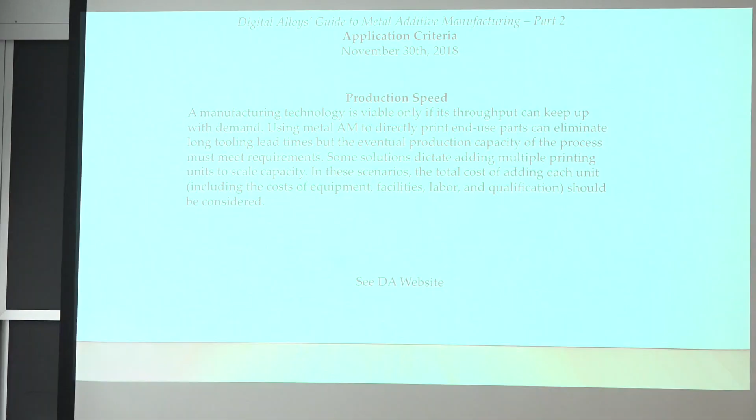So additive manufacturing—if you don't have any questions, hopefully we'll have some to ask Alex next week. We've gone through parts 1 and 2, sort of, and he listed all these different companies and different processes: directed energy deposition, powder bed fusion, powder binder, and others. Look at all these companies—these are not little bit players.

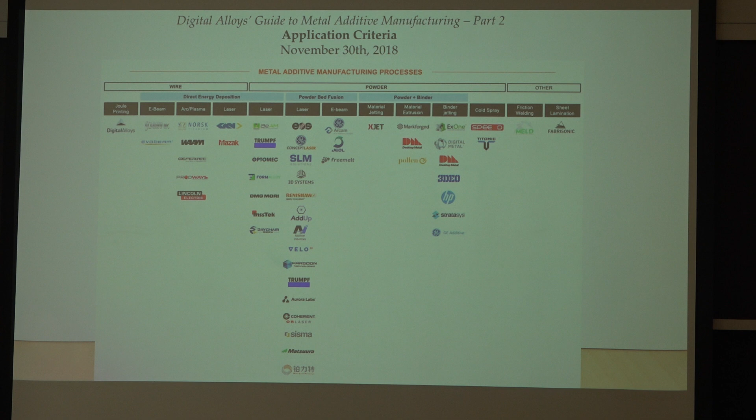Hewlett Packard, GE, Trumpf Laser, Coherent Radiation, Lincoln Electric—the biggest welding company in the world. And then you've got these little companies like Digital Alloys and Desktop Metals, which have very close ties to this department. Now let's go through what I skipped yesterday—a real life example.

So this is a blog, basically, that you can find on the web. There's this guy, Don Nelson, called the Additive Report—he writes newsletters just about additive manufacturing. This is from about 10 months ago.

He writes, as a science writer, that he learned eyeglass hinges are a good additive manufacturing candidate in a recent telephone interview with the CTO of this additive manufacturing company. Here's a quarter, and there's an eyeglass hinge made by powder bed fusion with a binder. He says they can make 45,000 pre-assembled 12 by 5 by 6 millimeter eyewear hinges in a 4-hour shift. Wow.

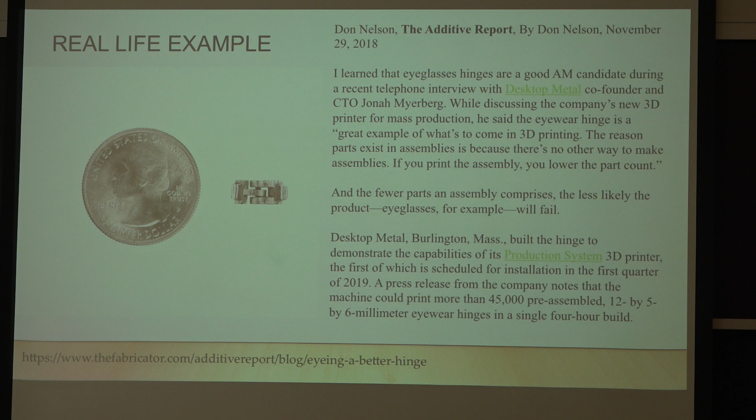So what are these things made out of? I mean, look at them. Well, these eyeglasses are titanium, but in powder bed fusion, you tend not to use titanium powder. A, it's horrendously expensive. B, titanium compared to steel powder—steel powder is pretty cheap.

What else was I going to say about this? If it's not titanium frames, it's probably brass, some sort of brass. Could be stainless steel, okay? And powder bed with a binder is probably fine for stainless. It might be okay for brass and whatnot, but we'll talk in a little bit about what this is competing with. But there's the part.

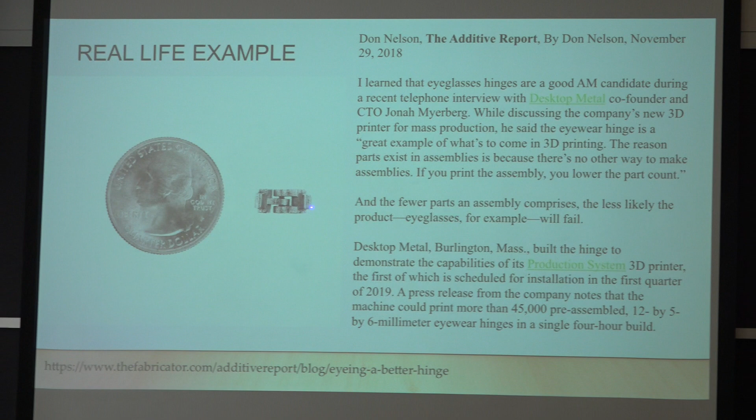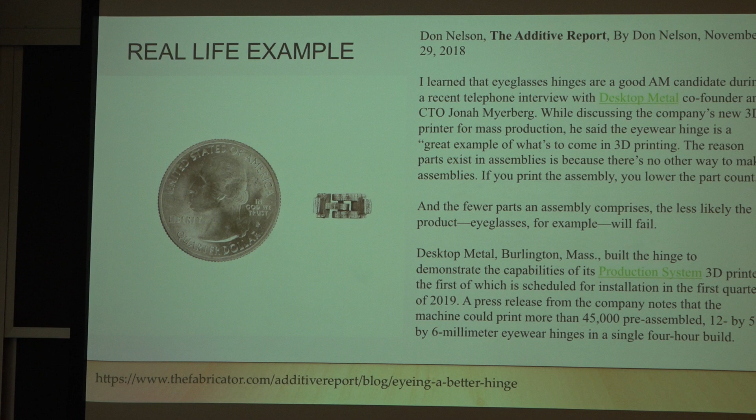Can you see the surface properties of this? They're talking about how you can take three pieces—this hinge and the hinge pin, which we've all had problems with, the screws in our eyeglasses if you wear glasses—and make them all in one part. So we reduced the number of parts, which is a very important design rule in manufacturing, to simplify things and save money.

But do you think people really want a hinge that has that surface roughness? It's going to need to be polished up, particularly if one of the hinge pins is this thing. You don't want the thing flopping around, right? And if you got surface roughness like that, you're not going to have the tight clearances you need for an eyeglass.

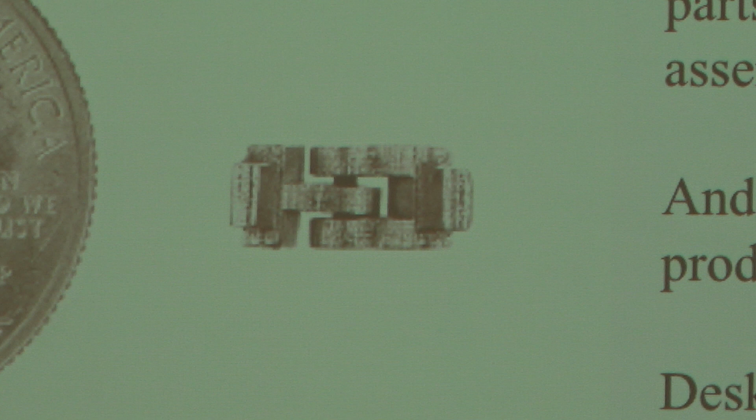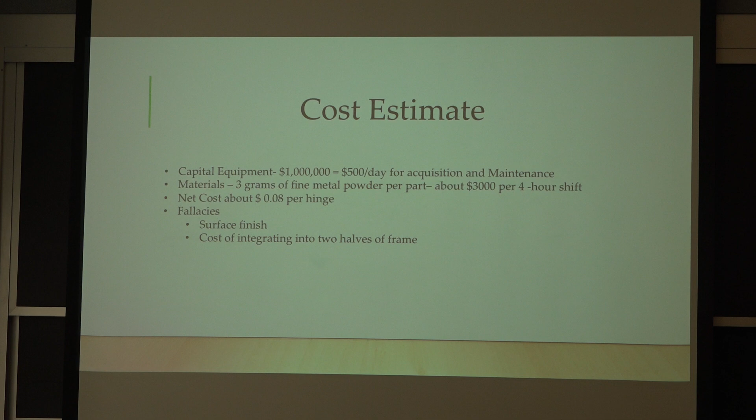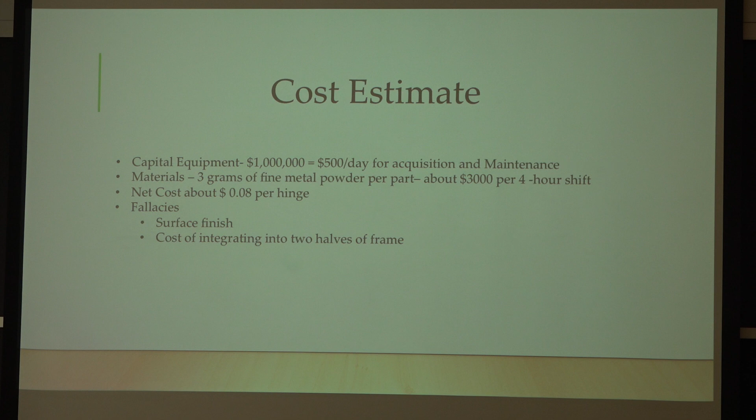And if you start looking at a mechanical machine, it requires a fair amount of maintenance. Mechanical parts wear, okay? And this thing's moving pretty fast. The materials, if we use 3 grams of fine metal powder per part, that's going to work out to about $3,000 per 4-hour shift. The net cost, as I work this out, is about 8 cents per hinge, okay?

The fallacies are the surface finish, and the fact that—well, I don't really care, I'm actually going to make the frames in 3 parts: this leg, that leg, and the frame for the lenses. And then I'm going to assemble it anyway. So I don't really need to make 3 parts together—at least not these three parts. In fact, I might want to disassemble that. How do I repair that if the thing broke? Now, if I lost a screw, I could just replace the screw. So it doesn't really make much sense to me, okay?

Plus, how do we make these hinges today? Well, if you go down to Attleboro, Massachusetts, there's a company called Leach & Garner, which is the reason Attleboro is the gold capital of the world. They have what they call a fancy wire division. Instead of making round brass or gold-filled wires, which are brass with gold on the outside, they have a room the size of this room that has all these dies.

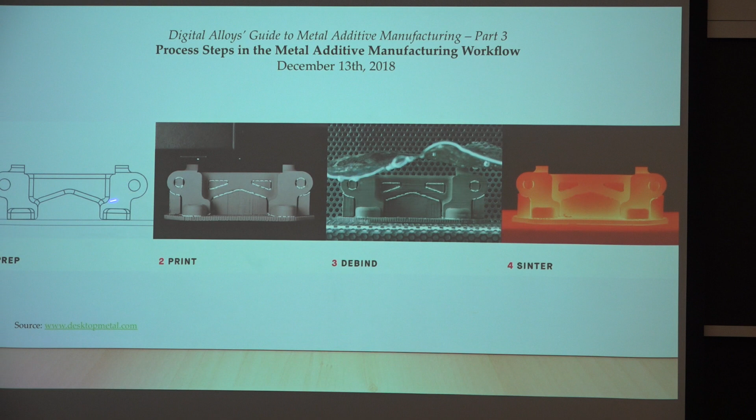Now, part of the step in any binder process is you start with a design. And in the early days, 30 years ago, of desktop 3D printing, the big deal was the software -- to take a 3D object in the computer and slice it into layers, and then change that to the rastering for the robot that's doing the 3D printing, okay? That was what everybody from 1990 to 1995 was working on, that software.

Well, that software you can buy from 20 different places now because everybody was working on it. And you make your green part -- I passed around a green part the first day of class, and it came back in 2 pieces because it doesn't have a lot of strength as a green part, okay? It's just sort of like a piece of candy that you can snap, because it's got porosity and the binder's not all that strong.

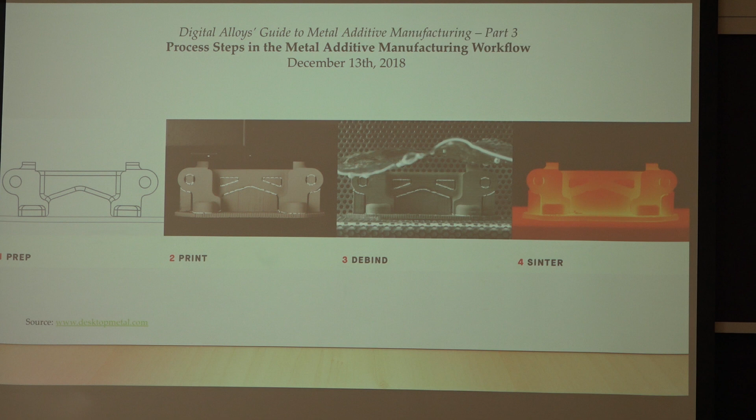Then you debind it, you get rid of all the extra powder and stuff, and you put it in a furnace at a lower temperature, and you boil out the impurities of the binder, the adhesive that's holding it together. That used to be called binder burnout. And when Mike Cima became a young assistant professor here, he changed that to binder pyrolysis, because binder burnout sounded sort of non-techy, okay?

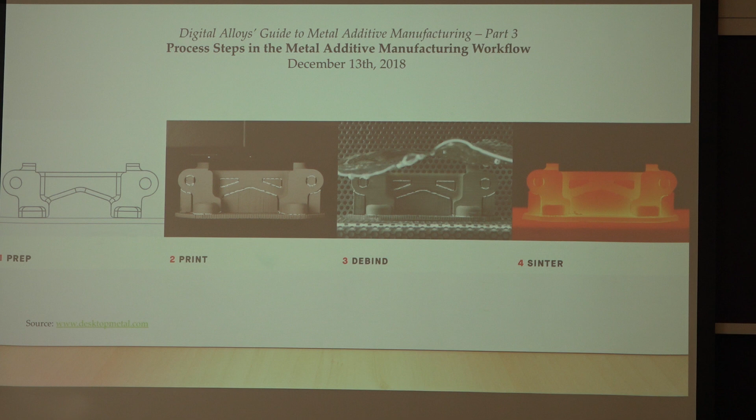But now it's called binder pyrolysis because you're burning it off. And then you have to put it in an oven, because whenever you put powders together -- I don't care what you do, if you study powders, and the ceramists know more about powder processing than anyone else, they've been studying it scientifically for over 100 years -- if I take sugar or salt, or you take your powder and pour it into a vessel and measure the density, it's half the density. It's 50% dense, half of it's air. Doesn't matter if it's spheres, doesn't matter if it's irregularly shaped, unless it's like fibers, okay?

But for any kind of equiaxed but angular or spherical or smooth powder, 50% porosity. So you burn out the binder and you still got 50% porosity. What kind of strength are you going to have on 50% porosity? It's even weaker after you burn out the binder than it was when you had the glue in there holding it together. But you're going to be careful.

And then you sinter it. What happens when you sinter something that's 50% voids? How many voids do you have left? About 3%, okay? Any metallurgist or ceramist will tell you this, you'll always get a little bit of porosity left over. It has to do with grain boundary motion and things like that.

There was a faculty member here when I was a student, Bob Coble, he had been at General Electric as a ceramist. He came out of this department, went there, and he developed a process to take aluminum oxide powder and make it basically 100% dense by putting in impurities that impeded the grain boundary motion. When they sintered that aluminum oxide tube, they could get a translucent tube, and it was called Lucalox, the General Electric name. All the light bulbs around the country, particularly the outdoor ones, were high-pressure sodium vapor lamps because Bob Coble invented Lucalox, which all had to do with grain boundary motion and sintering.

Pixel by pixel manufacturing cannot compete unless you have a functional advantage to your part. If it's just a paperweight or a little fastener that holds a piece of wood furniture with a machine screw, or an eyeglass hinge, believe me, you're not going to compete. You've got to have a functional advantage.

You'll see later things like General Electric and their aircraft engines—they're saving tens of thousands of dollars on a part that used to be 20 parts welded together, now made in one part with little nozzle designs, getting more efficient flow and better fuel efficiency. That's worth millions of dollars.

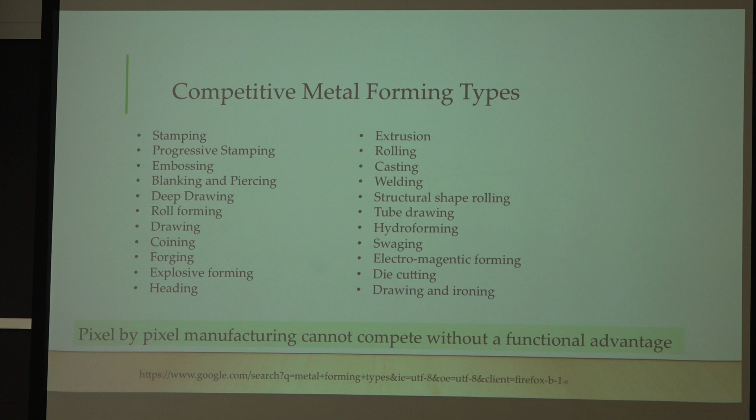So yes, additive manufacturing makes sense, and you can pay $5,000 for a little part the size of your fist. But you can't make an automotive part that way, or do it pixel by pixel. If you go to near net shape manufacturing, the Air Force in the 80s and 90s spent billions of dollars trying to make things near net shape—we'll talk about it later.

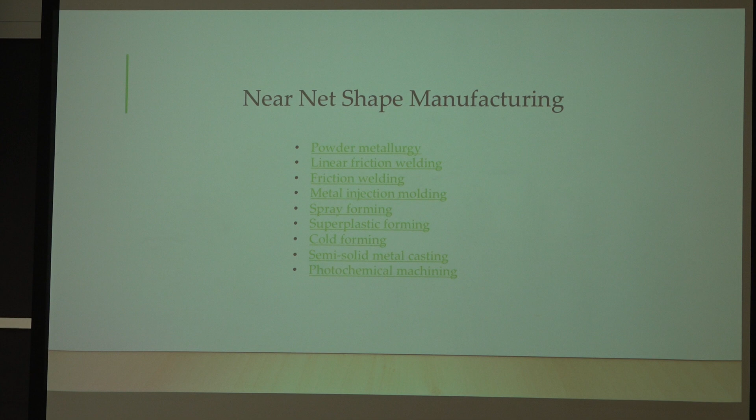If you look it up on Wikipedia, these are some of the technologies. Cold heading is a type of cold forming. Superplastic forming—if you want to know about these forming processes, I give a module on deformation processing. But again, pixel by pixel manufacturing cannot compete without a functional advantage. Remember, there are structural materials and there are functional materials.

Structural materials are made in very large volumes. You're not going to make steel I-beams by additive manufacturing. You can make them by rolling.

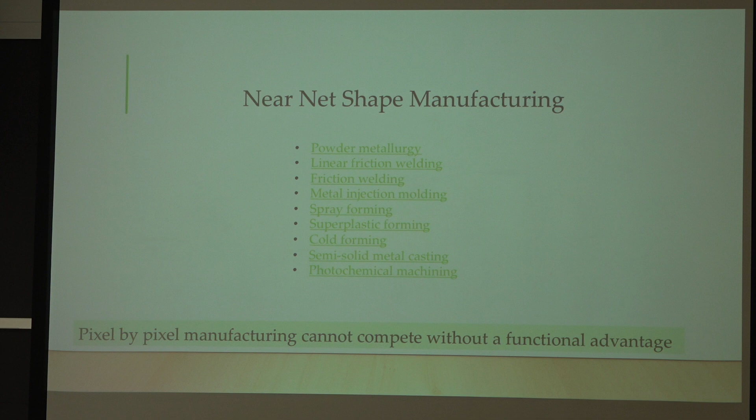That's how Bethlehem Steel, who's now defunct, but they were the first company that hired me, started to be the second largest steel company in the world because they learned how to roll I-beams. And they built New York City. The tallest building before Bethlehem could roll I-beams was about 10 stories, because you had to make riveted I-beams. Bethlehem learned to roll them on the mill. All of a sudden, a cheap process to make I-beams, efficient use of steel, you can go up 100 stories. So some people consider that rolling of structural shapes was one of two technologies that built this second largest steel company in the world.

One was rolling structural beams. The other, they came up with a type of tool steel that was better at machining than anything else, with very high hardness and stuff, and they got a patent on that.

Talking about building construction, have you seen the concrete 3D printer that can print a house?

I think I have seen it. And they're just squirting out concrete, okay. I'm sure you can do it, but I think I can pour concrete into forms cheaper, okay?

Same comment that I have. Because you still need to produce concrete, you're just changing the nozzle instead of simply putting it in a form.

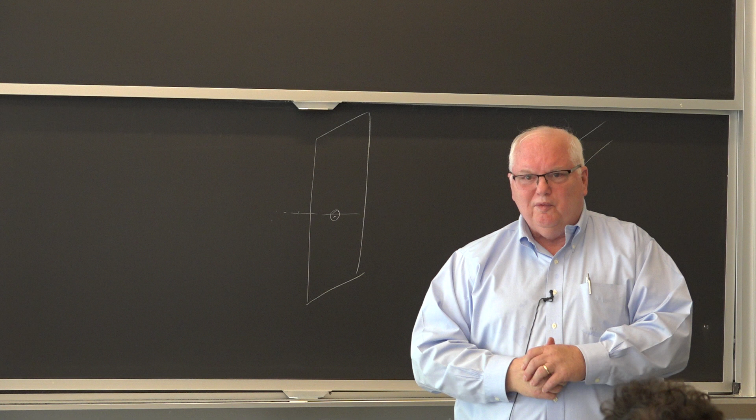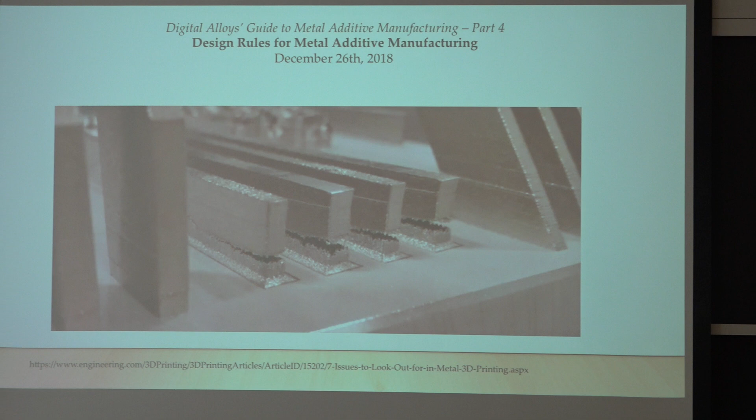Yeah, it is. It's great for building a one-of-a-kind home. Okay, well, I guess people want one-of-a-kind homes. Other questions? So, I'm not trying to rush this necessarily, but part 4, design rules.

One of the design rules involves limitations on the size of what you can build, because most of these processes, not all of them, build up residual stresses. You can see what happens with residual stresses if you're trying to electron beam or laser glaze or melt a surface—you're going to end up cracking. That's covered in the January 1922 Welding Journal article on residual stresses and cracking.

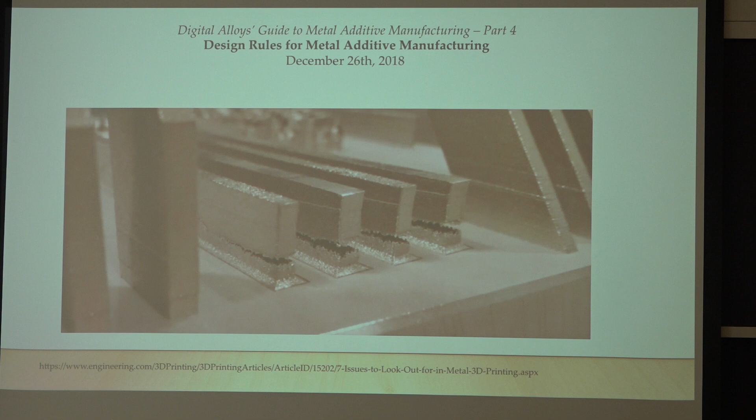Later, Alex goes through and has a nice little plot—it may not be his plot, he collected a lot of this from various sources—and it shows the maximum size when you get to blogs 9 or 10.

Now he has a quote I like, by Antoine de Saint-Exupéry. Who is he? He wrote Le Petit Prince, the Little Prince. He was a writer in France.

The book was translated into 300 languages and sold 140 million copies. It's about a little prince who visited different planets in the universe—one where he learned about loneliness, another where he learned about hope, and so on. But Saint-Exupéry was also a mail pilot.

He flew airmail planes before World War II, so he had some engineering knowledge. He said, a designer knows he has achieved perfection not when there's nothing left to add, but when there's nothing left to take away. Of course, anybody working on airplane parts knows you're looking for the lightest weight—your perfect design is when you've whittled away every extraneous part to get the lowest weight for still adequate strength. He has this nice quote, and a number of people like to quote him. He was a very articulate airline pilot.

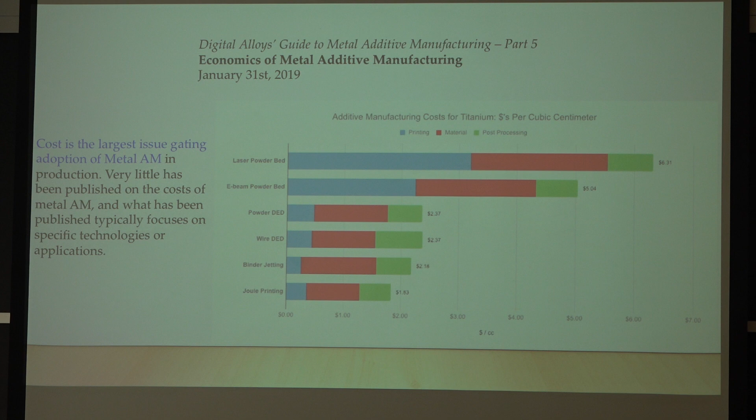So here's the economics—this is part 5, and what he's done is look at titanium. Why titanium? Well, that's their be-all and end-all. I pass around my little World Trade Center thing virtually every class—that's their part. They're making titanium parts for Boeing, or they hope to sell parts to Boeing. He says cost is the largest issue gating adoption of metal additive manufacturing. That's true for most things.

I remember a very prominent faculty member in this department, when he was an untenured associate professor, walking across campus with me toward the Sloan School. He said, did you see Joel Clark's article in the Journal of Metals? I said yeah. He said, you know, I never thought about it before, but cost really is important, isn't it? I thought, whoa, okay—I said yeah, it is. But now he's one of the most successful people, because he's learned that cost is important. He's started many companies since.

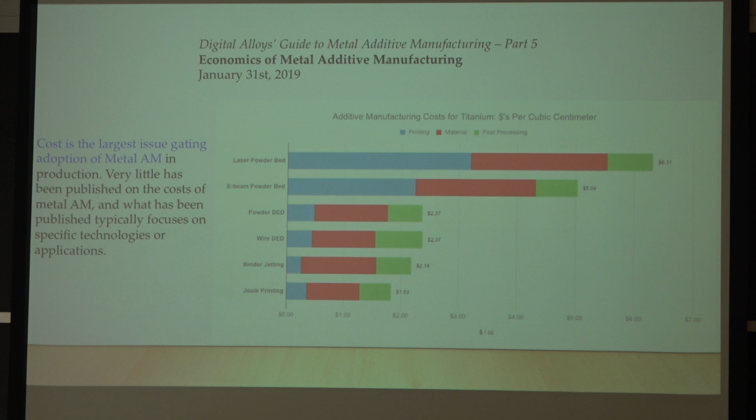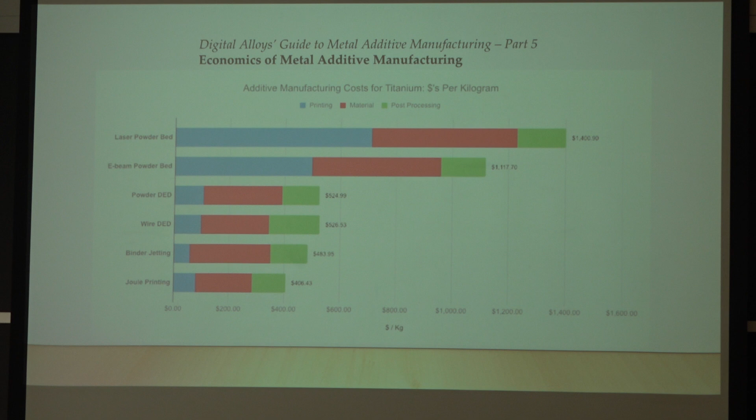And I did the cost ratios—I showed them to you yesterday, cleaned them up a little after class. Here's titanium, really about $900,000 per cubic meter in wrought form, $3,200 for steel, $5,000,000 per cubic meter for additive manufacturing. Steel is cheaper powder than titanium, and the ratios are still 5 to 1 and 625 to 1. I think this tells you why they want to focus on titanium—they only have to come up with an advantage that gets rid of the 5 to 1 disadvantage.

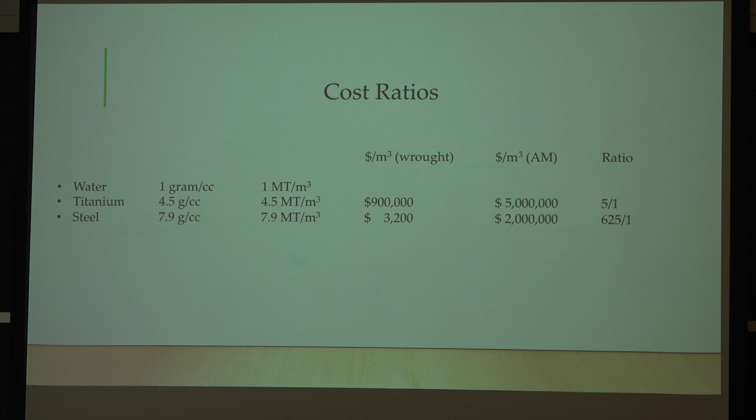And you'll see later in his blogs, they've really done it—Boeing's really done it, when you look at the overall system cost.

Then he's got a plot—we won't dwell on this—comparing costs of the different processes, per unit printing cost, just for printing. Of course, theirs is not the cheapest; binder jetting, like Desktop Metal, is potentially the cheapest.

But this is printer utilization time. Theirs, in the binder jetting category, only gets about 1,000 hours per 8-hour shift per year, which is about half time for the 8-hour shift. That's because these are mechanical machines working very rapidly, with a lot of maintenance time—not like a continuous steel caster that operates for 3 years without shutting down for major repairs.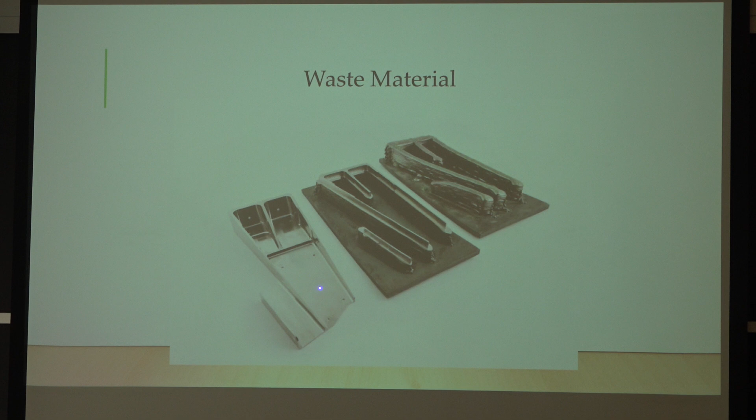You say, well, that's a lot of work. Except if you look at the buy-to-fly ratio - and if we're talking about aerospace parts, this is a very important parameter. The Air Force has been calling this the buy-to-fly ratio, dollars per kilogram. They're claiming 3D printing, their process is flat, depending on the buy-to-fly ratio. That's not really true, but they're going to present it the best way. If you talk about hogging the whole thing out by CNC machining, the buy-to-fly ratio raises the price to $3,000 a kilogram at a 30-to-1 buy-to-fly ratio. There are a lot of parts in an aircraft, particularly military aircraft, that are 30-to-1 buy-to-fly ratio. That's why the Air Force spent billions of dollars in the 80s and 90s on net shape manufacturing processes, which didn't include additive manufacturing.

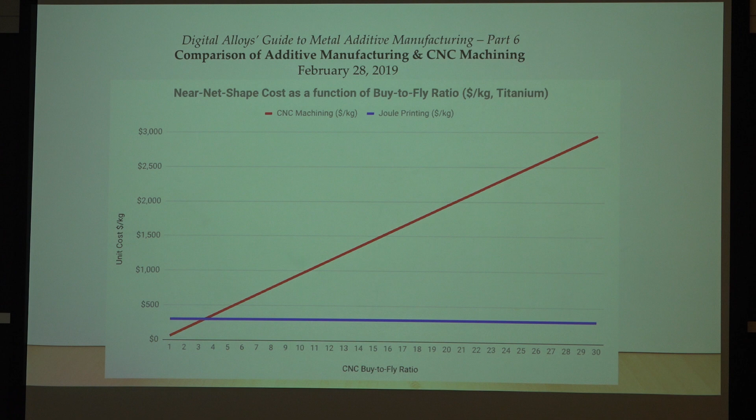Now here's a buy-to-fly ratio of a real part: titanium 6-4, this alloy made over at Watertown Arsenal after World War II, the most common high-strength titanium alloy in existence right now. Here's the final part - it's a bracket, a T-shaped part. In the old days, you would make this out of a solid block of titanium, and you'd have a 17-to-1 buy-to-fly ratio. 94% of your material goes off as machining chips.

Sorry, I don't understand - what's the units of buy-to-fly? Buy-to-fly is how much material do you buy from your material supplier versus how much weight do you fly on the aircraft. That's why they call it buy-to-fly. Sorry, thanks for asking - that probably wasn't clear to some other people. To me it's second nature because I've been using it for 30 years. But what's the weight of the part you buy from your material supplier?

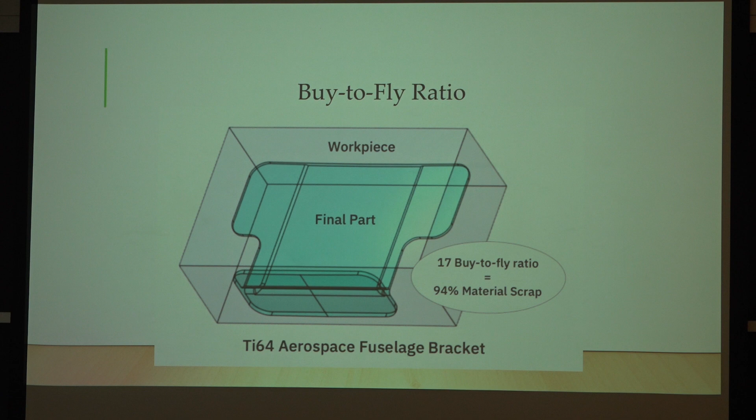So they buy a titanium plate from Timet. Timet, to give you a sense of the scale of these industries, is the world's largest titanium producer. And they can't afford to buy a rolling mill to roll titanium - we don't make that much titanium, or they can't sell it at the prices it goes for. They would purchase one day on the Republic Steel rolling mill per month to roll all of their titanium for that month. Given the fact there are probably 12 plate rolling mills in the United States for steel, you can figure out that ratio - one day out of thirty, because these things run 24/7 at a steel mill. When you invest a billion dollars in a rolling mill, you keep it busy. But all of the titanium plate production in the United States can be made in one day, in one month, in one mill. So when we talk about scale, you've got to remember there are huge differences in scale of things.

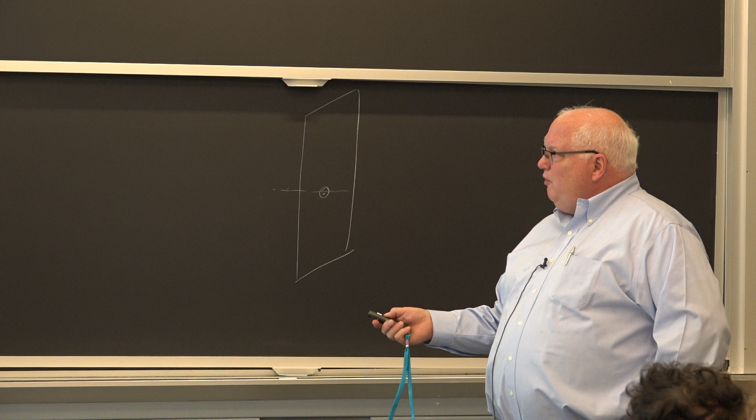This is from Leo Christodoulou. I didn't know until yesterday when I was looking at the blog - Leo's wife Julie, both of them are doctors. He used to head a lot of the materials work at DARPA, the Defense Advanced Research Projects Agency, giving away hundreds of millions of dollars on advanced manufacturing. I learned that he's now chief technologist for additive manufacturing at Boeing. And his wife used to give me a research contract from the Office of Naval Research.

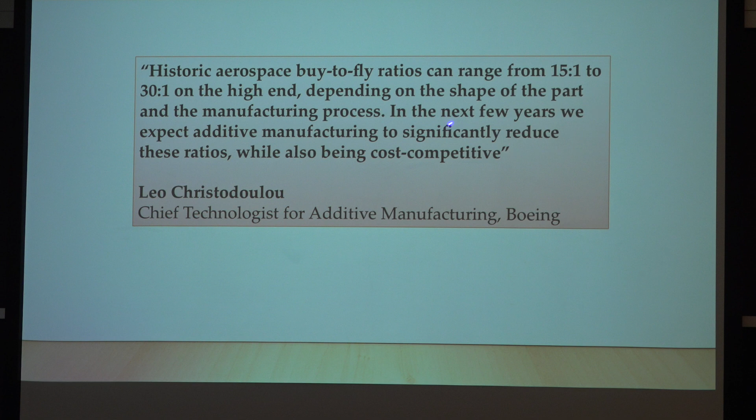Historic aerospace buy-to-fly ratios can range from 15-to-1 to 30-to-1 on the high end, depending on the shape of the part and the manufacturing process. In the next few years, we expect additive manufacturing to significantly reduce these ratios while also being cost competitive. He is not an idiot - he used to give away hundreds of millions of dollars on advanced manufacturing, and now he's working with Boeing to figure out how Boeing can make use of it.

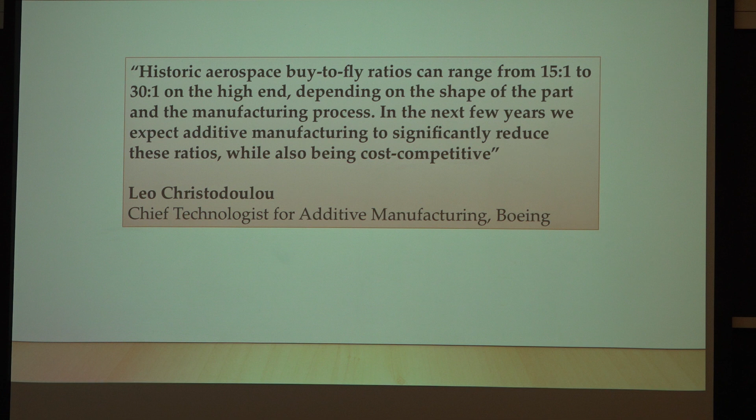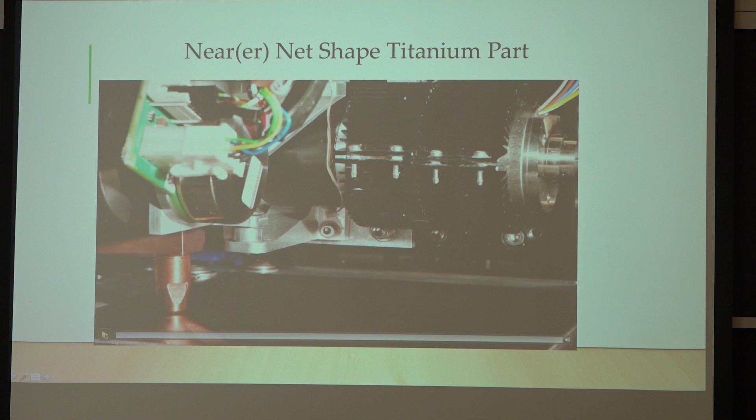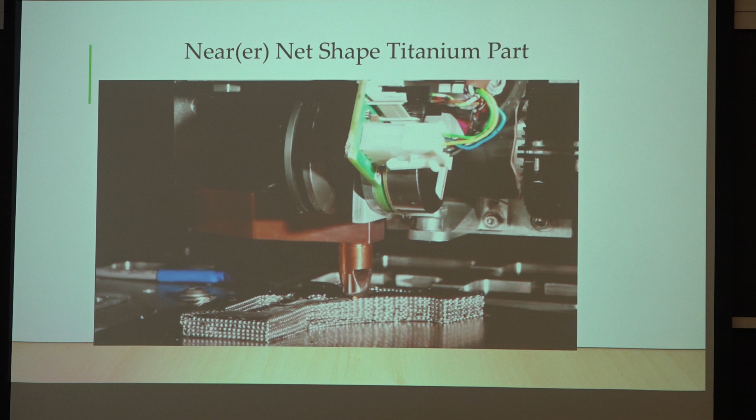Oops, I didn't hand around the sign-in sheet, sorry. Anyway, tomorrow we'll talk some more about this. They show that you can make the part in 18 days versus 40 days for CNC machining, at a reduction in cost of a factor of 2.5 when you look at the whole system. So additive manufacturing works for these parts - doesn't work for eyeglass hinges though.